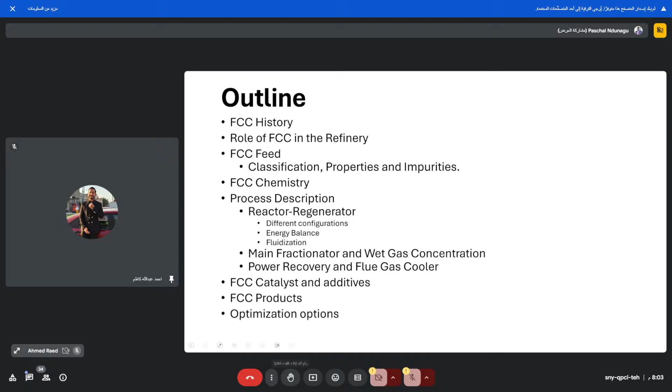So a brief history. The start of the FCC refining industry has its roots in the rapidly growing demand for fuels. So way back in the 1800s, what people wanted was kerosene to light up their lamps, right? But with the invention of the electric bulb and cars, the choice of fuel moved from kerosene to gasoline. And the demand also got so high, especially during World War II.

And we got to a point where the available naphtha or gasoline, which could be gotten from straight run CDU, was not able to satisfy everyone. And at that point, the bottom of the barrel, which is the last product of the atmospheric distillation, was just thrown away. And somebody had a great idea. Why don't we further crack the atmospheric residue and squeeze out some gasoline from it? And thus the FCC was born.

But before the FCC was born, there were some previous technologies that gave birth to the FCC. And because the FCC is a form of cracking, in this case catalytic cracking, there was, if I may say, an older brother of the FCC, which was thermal cracking. Now, thermal cracking simply used high pressure and temperature to get out as much distillates as possible, your naphthas and your gas oils. But the yields were not so palatable, and they generated a lot of gas, which people didn't like.

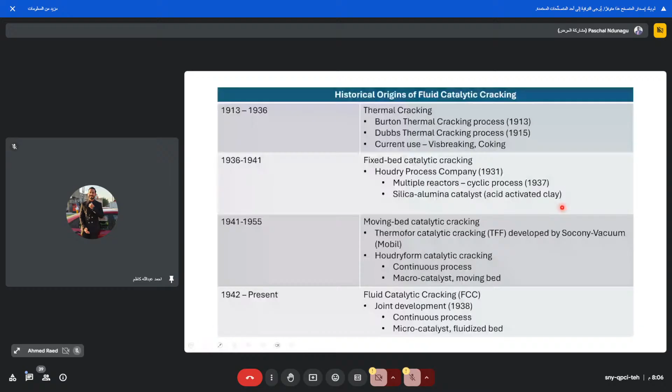So we went on to start using catalysts in the 1930s and 1940s by the Houdry process. It was a breakthrough in the sense that we could lower the activation energy of the reaction. We didn't need much heat or pressure, right? But it was slow because it was more like a batch process. Then we got to the moving bed catalytic cracking, which was another step.

There were advances in catalyst, okay? But the final product was the fluidized catalytic cracker, which is a continuous process. It can run all year round. And our catalyst became finer. The studies of catalysts became very, very significant during this period. And we all know that bigger surface area is good for chemical reactions. And this is what drove the FCC into one of the most profitable units for fuel processes in the refinery.

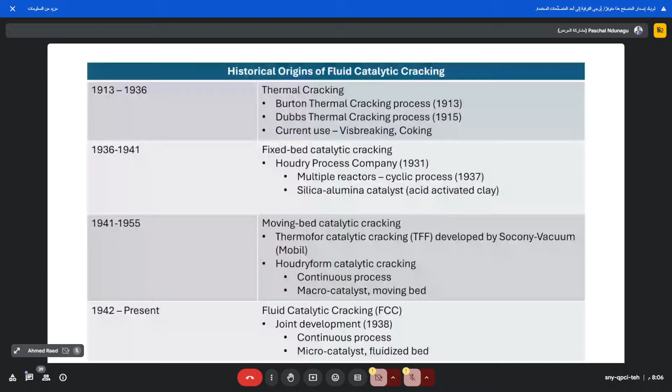Now, we consider the FCC to be the mother, to be the heart of the refinery. Because if the FCC is down, the tendency that...

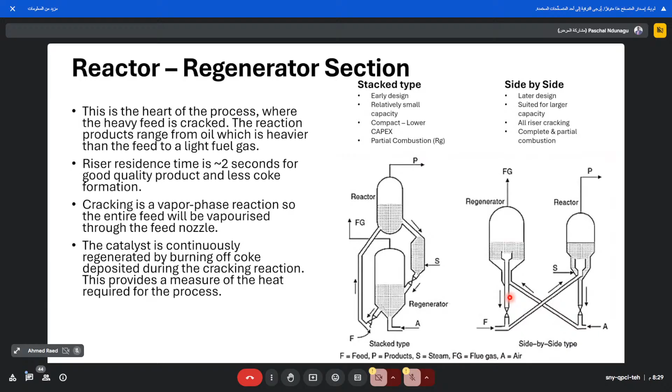Now I'm going to talk about some basic concepts of FCC. The side-by-side model has a lot of variations, a lot of models. Like your iPhones, you have iPhone 11, 12, 16. I've lost count. I don't know if they're 19 or 18 right now. So it's the same way with FCC. There are different models. So I decided to present to us the bubbling bed regeneration model.

So now this is how it works. The feed comes in here, and at the bottom of here, it is atomized. I told you that the feed has to be in vapor form, so it's atomized, and it comes in contact with hot catalyst coming from the regenerator. Now they mix up, and this long pipe or long conduit is the riser, and from here to here, the catalyst will take only 2 seconds, and this is where the whole reaction happens within this line. Kind of like a plug flow reactor.

Now, when it gets here, the feed has attached itself to the catalyst, gotten cracked, produced products which are mostly in vapor. The catalyst, though it's in powder and light, is also a solid. So when it gets here, it falls down to this point, stays here and comes down through this stripper. Now, at this point, the vapor product disengages from most of the catalyst and comes into this cyclone. I'll show you these pictures in the next slide. It comes into this cyclone where it spins.

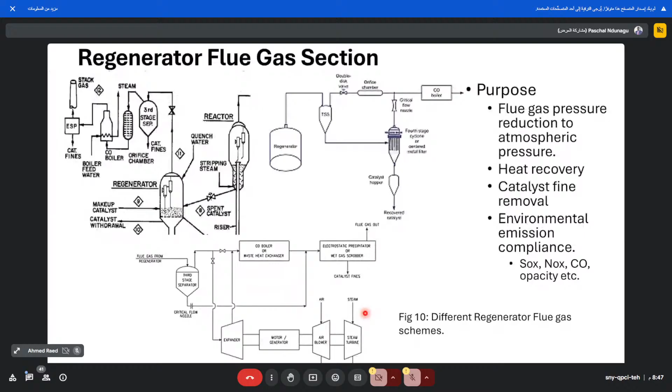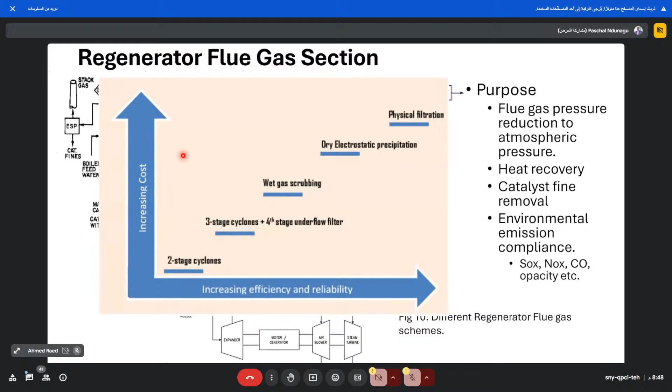Now, it's important that despite the fact that there are different schemes, they also have different costs. If you're only dealing with a 2-stage cyclone, which is what is in the regenerator already, which I told you takes 99.9% of the fines, that's okay. If you're going for a 3rd stage and 4th stage separator, you have higher efficiency in removing the fines, but the cost keeps going up. You can add a wet gas scrubber, electrostatic precipitator, and the more options you have, the higher the cost, but the higher the environmental compliance. Okay.

I'm going to play this video now, and please let me know if you hear what is being said. Okay. This is going to summarize all the things I've talked about for the past maybe 30 minutes. Let me know if you hear it.

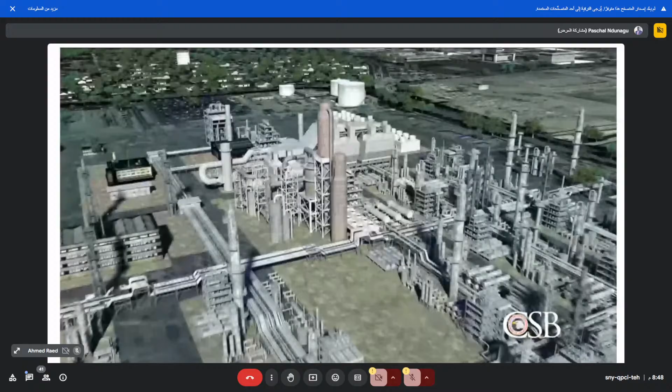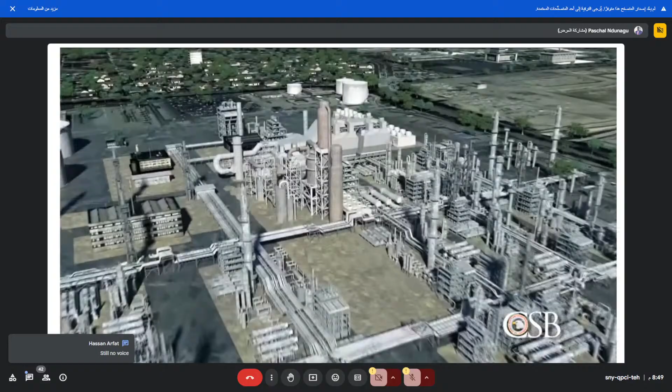Yes, sir, it's in. Can you hear it? Hello? You can hear the video, right? No, there is no voice. There's no voice. Try again. I was worried about that. Okay, I'll try again. Let me see. Can you hear it? No. Sorry, sir, there is no voice. I can't hear anything. Okay, let me try something.

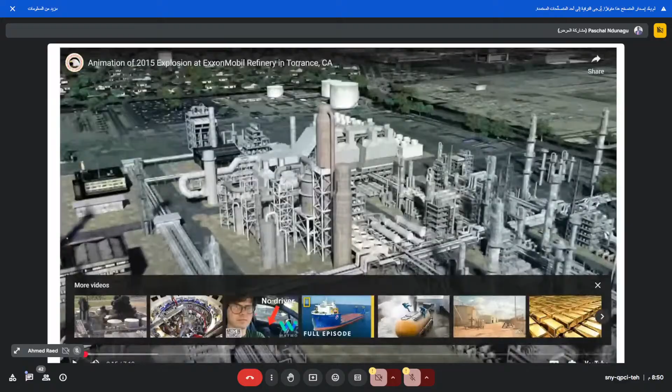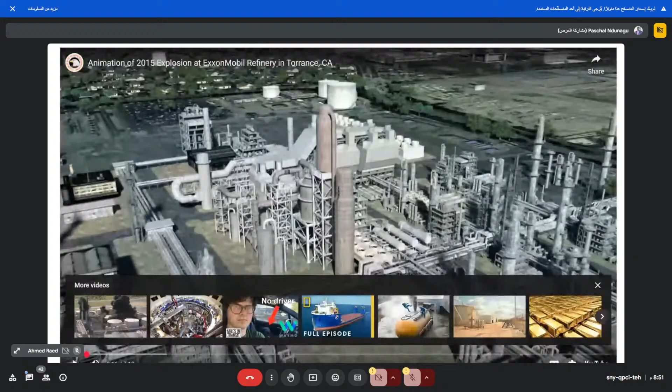Still no audio. Sir, can you check the setting of your share? Check the setting of your share screen. I think you need to share the full screen. Check your setting, please. Okay. Let me check the setting. Video. Audio. Sorry, guys. No problem, take your time. The audio setting. If there's an IT expert. Let's see if it works now.

Still no voice. Just give me a sec. So, in Google Meet, okay, if you tab. Okay. Just give me a sec. Not so sure. Okay. Sorry, guys. Just trying to get this working.

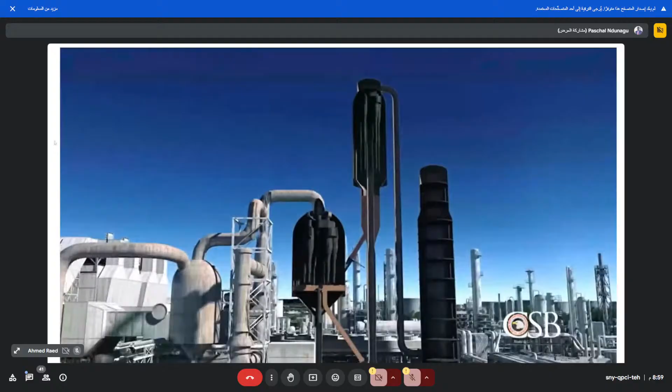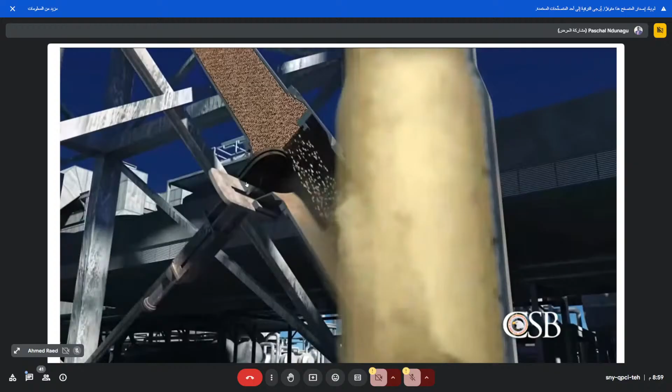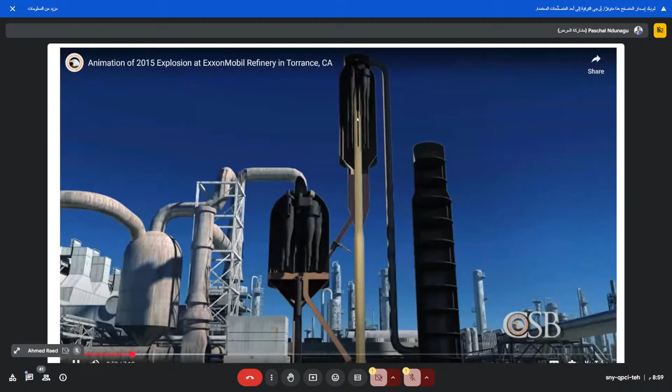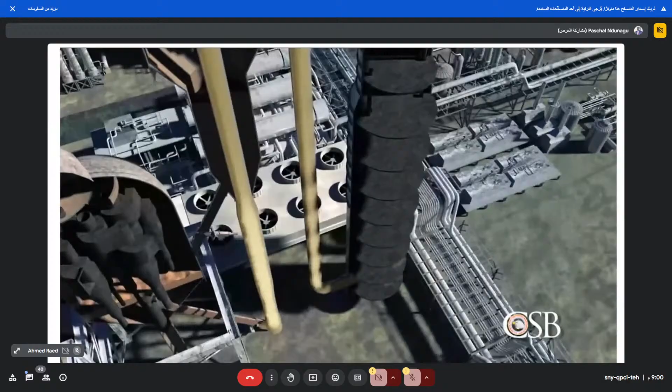So at this point, you can see the catalyst coming into the riser. This is the atomized feed, and you can see it coming in contact with the catalyst in the riser. Hot cat. Now this is the top of the reactor, where the vapor goes to the main column. Falls down to the cyclones. Okay, see what's going to happen.

I'll play this video at the end of the program. Is that fine? Yes, it's fine. Please, if we have any IT guru amongst you, help us get the solution to this problem. There's always one person. All right, let's go to the next slide.

We're going to talk about the FCC catalyst and additives. So what is the FCC catalyst made of? It's made of a couple of major ingredients. First is zeolite, the key active ingredient, which was discovered to have the ability to crack these heavy feeds. Together with your matrix, a type of alumina, you have your silica-alumina combination that makes the bulk of your catalyst.

Then you have your clay. The clay gives it density and strength, because this catalyst keeps moving for the rest of its life until it's so bad we have to change it. So the clay gives it the strength to withstand the movements over a long period. Then you have your binders, whose job, as the name implies, is to bring everything together.

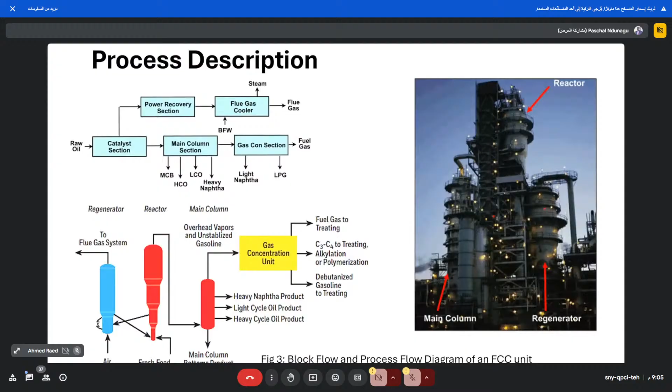Sorry about that. So sir, I have a question about the reactor phase. When the feed is entering, you said it's oil or crude oil, but I heard from previous lectures it will mostly be VGO. Is that correct, or is this an operational thing? Okay, so let me take you back to one of the old slides. These are the potential sources of FCC feed.

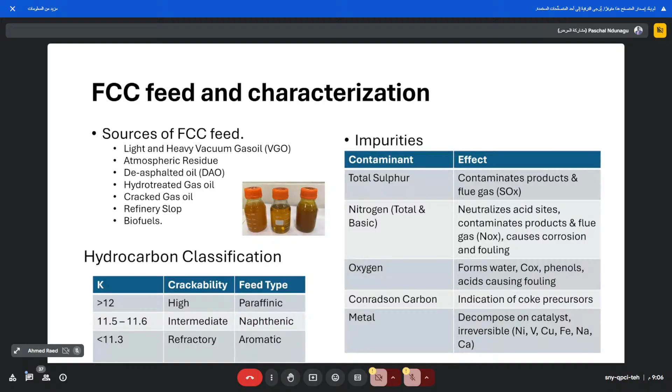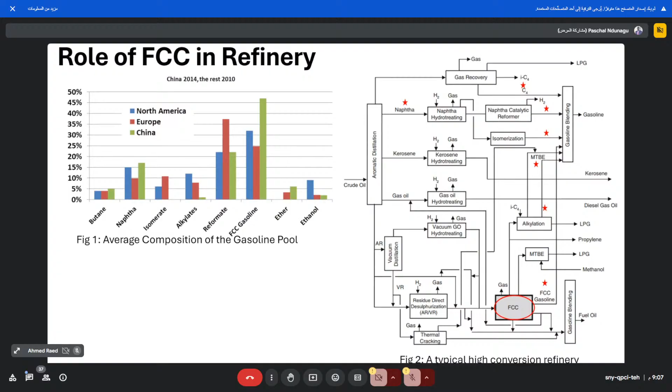But what it was initially designed for, in the good old days, was vacuum gas oil, a product of vacuum distillation. But because over the years people are trying to push the limits of this process, it's gradually being designed for so many other things. Does that answer your question? Ali? Yes sir, it's clear. But I have another question, if you may. Good, you're free.

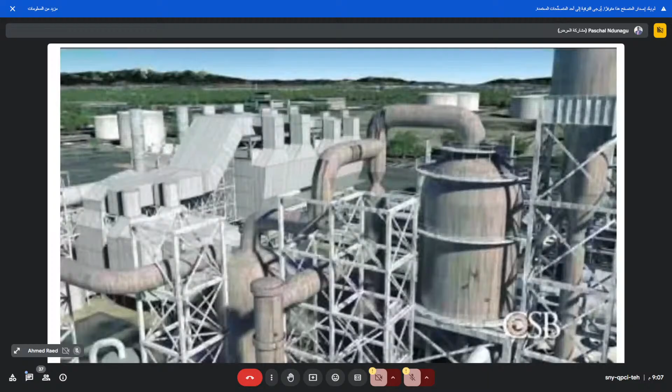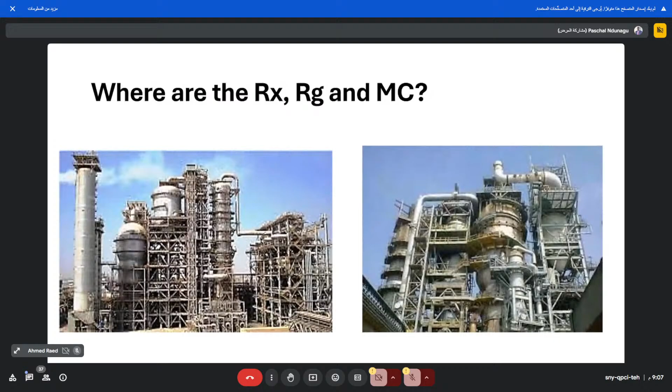When the top products leave the reactor and go to the main column, you said it's going to be a vapor or gas phase for the gasoline. Yes, and it's hot. So when it leaves the main column, is it going to be gas or liquid phase? And if it leaves as gas, how can it be converted into liquid? So you mean when the reactor vapor comes into this main column, how does it get converted to liquid? Exactly. Okay, that's a very nice question.

So do you agree with me that there are three states of matter? There's a fourth state anyway, but for your level I'll consider three. There's liquid, there's solid, and there's gas. Correct? Yeah. So water can be solid, water can be gas, water can be liquid. Correct? Absolutely. All right. So when water is vapor, if you cool water down, it turns to liquid, correct?

Imagine you're boiling water for tea, and you see your vapors coming up. You can cool it down to bring it back to liquid state, right? Yeah, exactly, it will condense. Exactly. So just imagine it happening here. You have your reactor vapors at roughly 530 to 560 degrees.

Very hot. Now, the vapor has everything inside. It has your slurry oil, your HCO, your LCO. LCO is like diesel. It has your gasoline, which is in your car. It has everything packed inside. But the distillation column is designed based on temperature gradients.

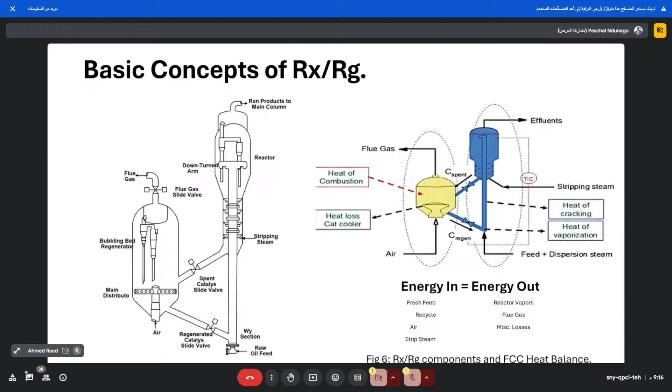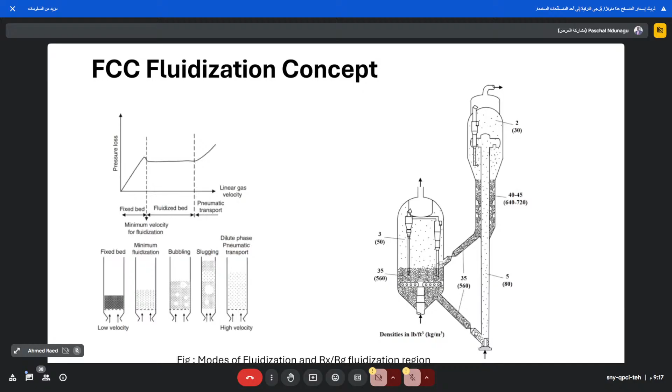That's a very good question. Is that your question, whether it has any effect here in the product, or the equipment? That's your question, right? Yeah, right. Beautiful question. I like that. I want more questions like this.

So when the reactor vapor comes in here, you will have some catalyst losses. Now, we use a lot of slurry oil as a recycle. Part of its job is to wash down the catalyst. So this slurry will have a mix of catalyst and oil in it. Now, if the refiner wants to recover this catalyst, some refiners, like MRC Kaduna, have a filtration unit. It's like a normal sieve: the oil passes through and it holds back the catalyst. In some cases, you can regenerate the catalyst and put it back inside.

Now, in some cases, if you don't have enough liquid in the trays, you have trays here depending on the product, those catalysts can find their way up here. So that is why I say operation of FCC is very delicate. If you don't develop a level of liquid in the trays, some stubborn catalysts can find their way up and damage your compressor. I have seen that happen. Sometimes you open your main column and see catalysts way up here, and ask yourself how it got there.

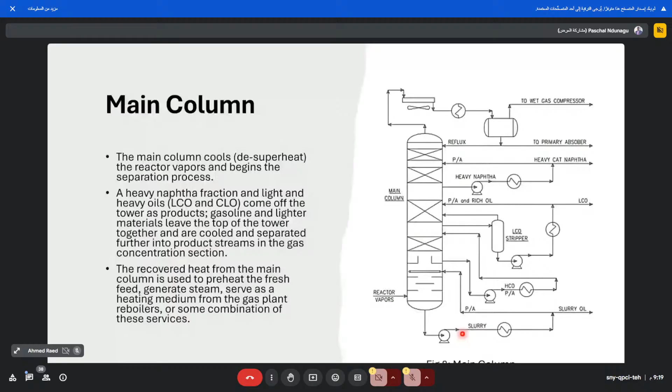So the unit has to keep circulating to trap the catalyst and send it down. But the bulk of the catalyst in the main column stays here. Okay, sir. That's a very good question. Also, the size of the atomizing, please? Yes, I will handle that in a later slide. Okay, no problem. Thank you so much. One more question before I move. If not, we will move ahead.

The discussion just generated a question in my mind, sir. Who's talking? Is it still Ali? All right, shoot. Sir, you said when you open the top of the main column, you find catalyst. Isn't that affecting the efficiency and the cost of the whole process, considering catalyst is very expensive? Is that spent catalyst, or could it be regenerated and reused, or does it go to waste?

So first of all, finding catalyst in the main column is not supposed to happen. Okay, at the top of the column, it's one in a 500 case scenario. It doesn't always happen. I just give you a rare situation. I think I've seen one before. Okay, it's not supposed to happen. So don't put in your mind that you find catalyst in the main column. No, you only find fines at the bottom of the main column. Okay, so let's get that straight.

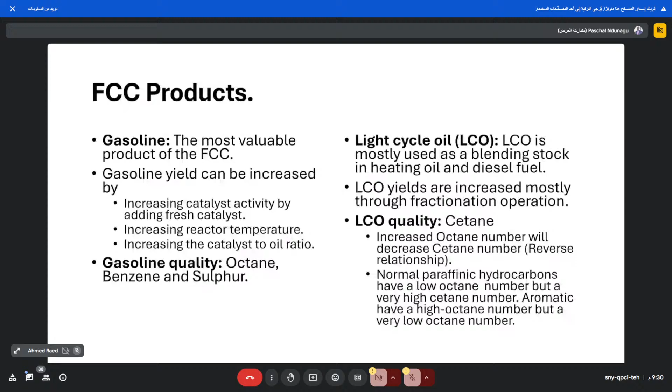Now we have the HCO and the decant oil. The HCO is not really taken as a product. It's usually used just as a pump around, as I've shown you in the previous slides, to transfer heat to other parts of the unit through heat exchangers. And you have your decant oil. The decant oil is where you most likely see your catalyst fines. Somebody asked a very good question. And it can be sold as carbon black. At the end of the day, it's the least valuable product in the FCC. So you try to minimize the LCO, the HCO, and the main column bottoms, your slurry oil, your decant oil.

Okay. Now, if you take out all those products and divide by the feed, that's feed minus these products, you have your conversion. So a unit that has conversions of 76 to 81 volume percent is producing a lot of gasoline and LPG, and in some cases dry gases, and minimizing the products that don't have as much value. So as an operator or engineer, your job is to make sure this conversion is high for the FCC by minimizing these, which gives higher gasoline and LPG products.

Now, finally, we have the coke. And I wish that video could play so that I'll be able to explain some things for you. I hope our IT person is working on the video. Now we have the coke. Yes, we are working on it. Okay, all right. Now we have the coke.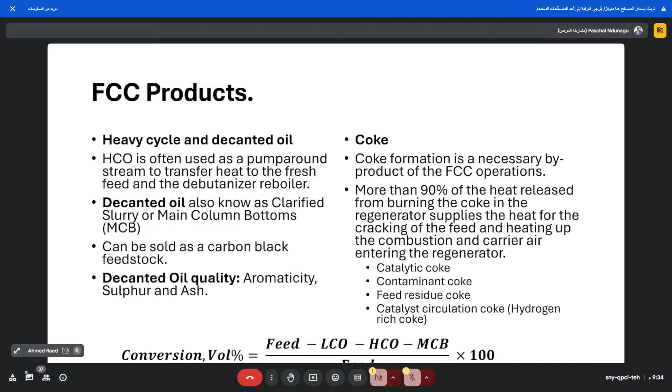Now for the last session of this presentation, before I enter this, I would like somebody to ask a question. I'm expecting some questions. Any question? We're entering the last hurdle. Any questions so far? Okay. So everybody is an FCC expert. That's good. Let's continue.

All right. So while discussing with, what's her name again, the first person that reached out to me, Abran, I guess that's her name. Discussing with Abran, she said she wanted us to also talk about optimization options, things that can be added to the unit to make it work a little bit better.

And there's so much that can be added to an FCC. There are so many things that can be changed. Some problems might arise, and the engineer might say, "Okay, let's do this, let's do that." There's a host of things that can be done. But for the sake of students, I'm going to talk about just four. Now, these are optimization options.

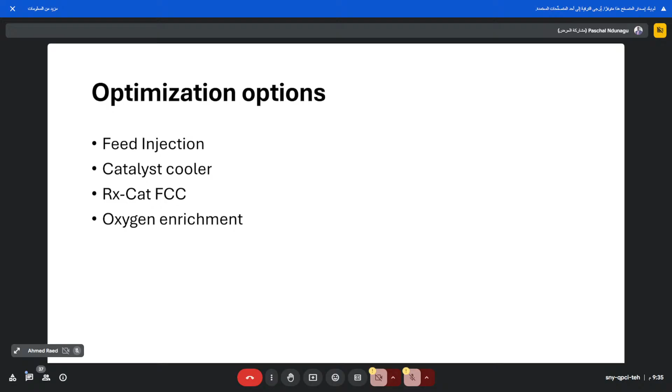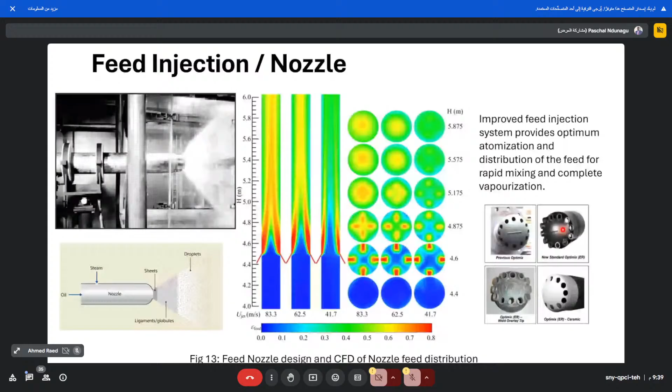All right. Now, the second optimization option is what we call a catalyst cooler. So because in the modern FCCs, the refiners want to push the refinery to the limit. We are now processing very heavy vacuum gas oils or atmospheric residues. And in the case of atmospheric residue, you have a very high Conradson number, which I spoke about before, Conradson carbon number. That's the coke forming tendency of the unit.

Okay, so for feeds that have such high numbers, when it is time to burn the coke in the regenerator, you agree with me that the coke would make the regenerator very, very hot because you have relatively higher coke, right? And you don't want your regenerator to be so hot. You don't want the regenerator to pass like 700 degrees centigrade. You don't want it to get to 750 or 800. It's a disaster waiting to happen. So because that can happen, if you use feeds that behave like this, somebody smart came up with the catalyst cooler.

So this is a device that will be cooling the catalyst in the regenerator. Okay, so it prevents the temperature of the regenerator from getting so high, which can cause a lot of problems. And if the temperature is too high, it will also reduce the amount of catalyst coming into here because of the energy balance. So with this, you reduce the temperature and this unit works efficiently. Now, how does this work? This is an expanded version.

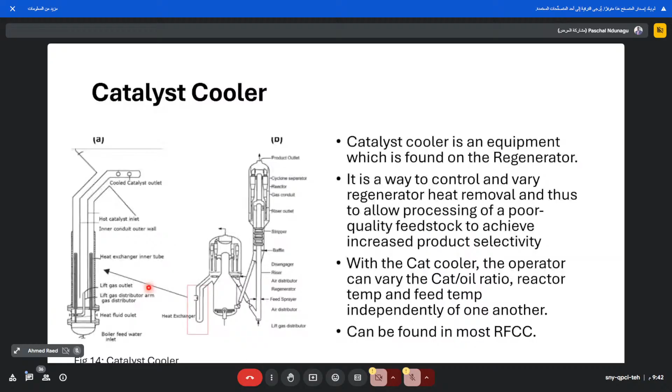Okay, so with this device, you can control the catalyst oil ratio. You can now easily control the reactor temperature because you don't want extremely hot catalyst to come into here. It can also damage this. You can control them independently with this. Okay, I know someone's going to ask a question about this, but let me explain one more slide. Now I'm going to explain these arms. Okay. Now this is the kind of FCC that is in Kaduna refinery. It's a very nice FCC.

Now, I spoke about cases when you have a high Conradson carbon number. You're trying to take out the heat from the regenerator. Now, in this case, when you talk about the Rx-Cat FCC, this arm: in a case where the coke forming tendency is very low, the disadvantage of that scenario is the regenerator will not have coke to burn. You have a minimum amount of coke being formed on the catalyst. And if the coke on the catalyst is small, then there's no heat. So the FCC will just die a gradual death, getting colder and colder, because the coke cannot form on the catalyst.

So someone came up with an idea and said, okay, since the bulk of the coke is formed here before going to the regenerator, why don't we just keep recycling the catalyst and coke inside here, and recycling the fresh catalyst inside here, and maintain the coke levels in the regenerator.

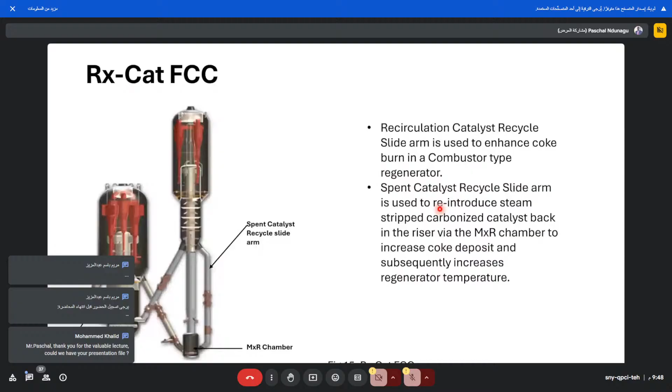Sir, I think we found a solution for the video. Do you want to present it? Okay, please. Can you please turn off your screen share and open your video from the browser and share the video from the video tab? Oh, wait, say that again. Okay, so turn off your screen share. Okay, like this. And from your browser, open YouTube and open the video. Oh, okay, makes sense. All right. Okay, and share it from video tab. Let me get the link. Just give me a sec. Okay, take your time. So let me share. So I'm gonna share the web page, correct? Yeah, from video tab. Okay.